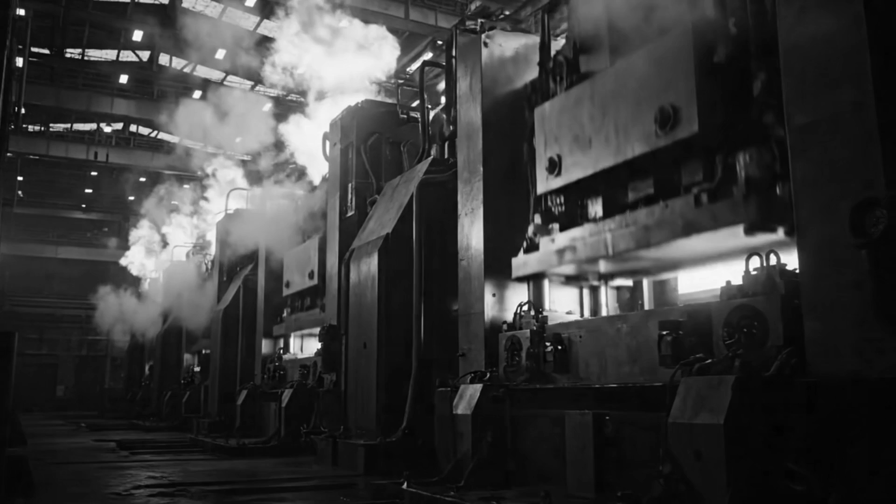December 1942, Toledo, Ohio. The temperature inside the Willys-Overland plant hovers at 98 degrees Fahrenheit, despite the snow falling softly outside. Steam hisses from hydraulic presses calibrated to exert exactly 12,000 pounds of force per square inch. Metal strikes metal with metronomic precision.

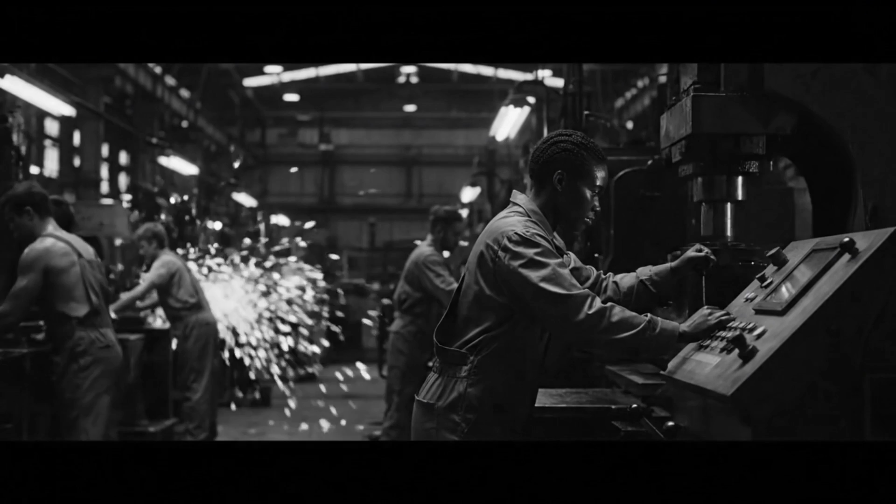A Jeep, olive drab, chassis number stamped 201-67455, rolls off the line under arc lights that burn at 2800 lumens. Four minutes pass, another follows, then another. Beyond these walls, armies move across three continents, burning fuel, wearing down machinery, demanding replacement at rates that would have seemed impossible just 18 months prior.

Inside, 3,000 workers, welders, machinists, inspectors, drivers, fight a different kind of battle. They are armed not with rifles, but with torque wrenches calibrated to 35 foot-pounds, with steel dies machined to tolerances of 5/1000ths of an inch. This is not merely a story of production. This is the mathematics of industrial warfare made manifest.

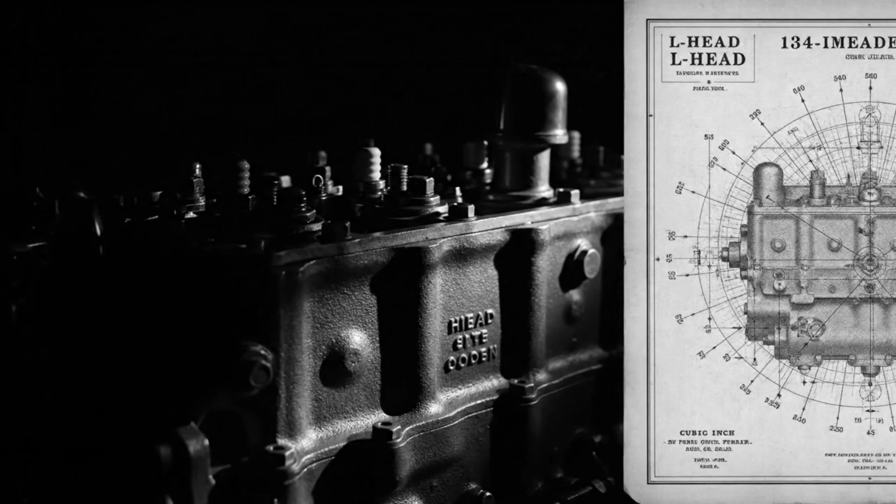The transformation began not with a declaration of war, but with a radio address delivered on the 29th of December 1940. Franklin Delano Roosevelt, speaking from the White House diplomatic reception room, articulated a vision that would require the complete restructuring of American industrial capacity. 'We must be the great arsenal of democracy,' he declared, his voice transmitted across 950 commercial radio stations to an estimated 60 million listeners.

The challenge implicit in those words represented perhaps the most audacious industrial mobilization in recorded human history: the conversion of an entire peacetime manufacturing infrastructure into a war production apparatus operating at scales that exceeded existing theoretical models of industrial output.

Before the 7th of December 1941, the Willys-Overland plant in Toledo occupied 375,000 square feet of manufacturing space dedicated to civilian automotive production. Annual output averaged 31,000 sedans, the Willys Americar, a modest vehicle retailing at $525, equipped with a 134 cubic inch L-head engine producing 63 horsepower. Chrome bumpers, civilian paint schemes, leather upholstery options.

The production tempo followed peacetime rhythms: 8-hour shifts, quality control prioritized over speed, tooling optimized for variety rather than standardization. The United States Army's July 1940 request for proposals fundamentally altered these parameters. The specification document, distributed to 135 automotive manufacturers, outlined requirements for what military procurement officers termed a light reconnaissance vehicle, a quarter-ton truck capable of traversing terrain inaccessible to conventional transport, powered by an engine generating sufficient torque for 30-degree inclines.

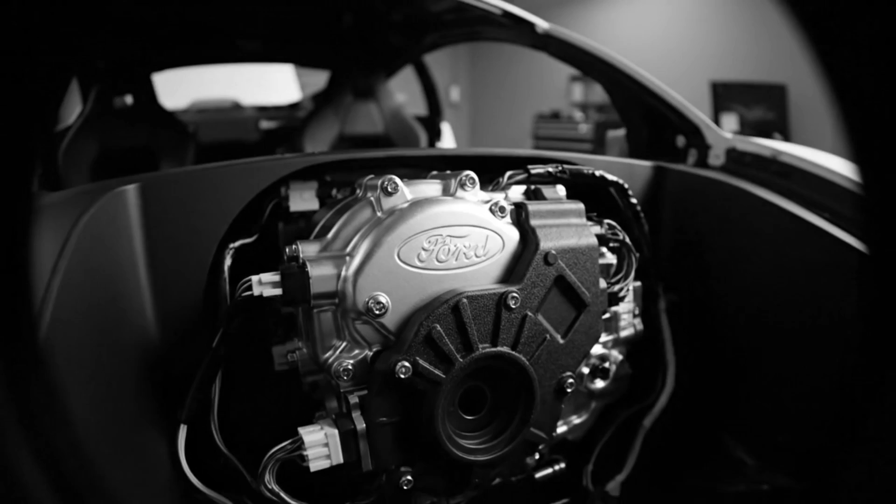While maintaining a loaded weight below 1,300 pounds. Maximum speed 50 miles per hour. Fuel economy minimum 20 miles per gallon. Production timeline: 75 days from contract award to first prototype delivery. 132 companies declined. The engineering challenges appeared insurmountable simultaneously: achieving lightweight construction, structural durability, and mass production viability contradicted fundamental automotive design principles. Three firms accepted: American Bantam Car Company, Willys-Overland Motors, and Ford Motor Company.

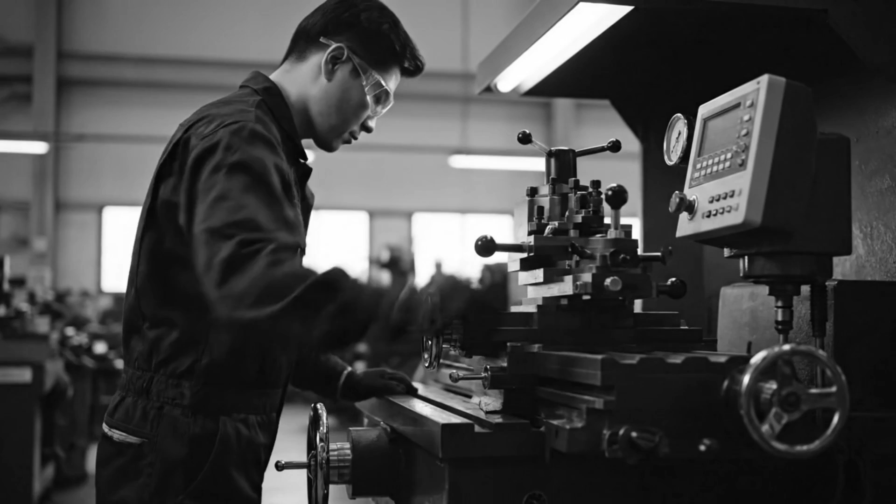What emerged from their competitive prototyping would become more than a military vehicle. It would represent a convergence of industrial engineering, metallurgical innovation, and manufacturing process optimization that redefined the relationship between design complexity and production velocity. The central question crystallized: how does an industrial system reconfigure itself to produce not what is profitable, but what is necessary, and to do so at rates that exceed all historical precedent?

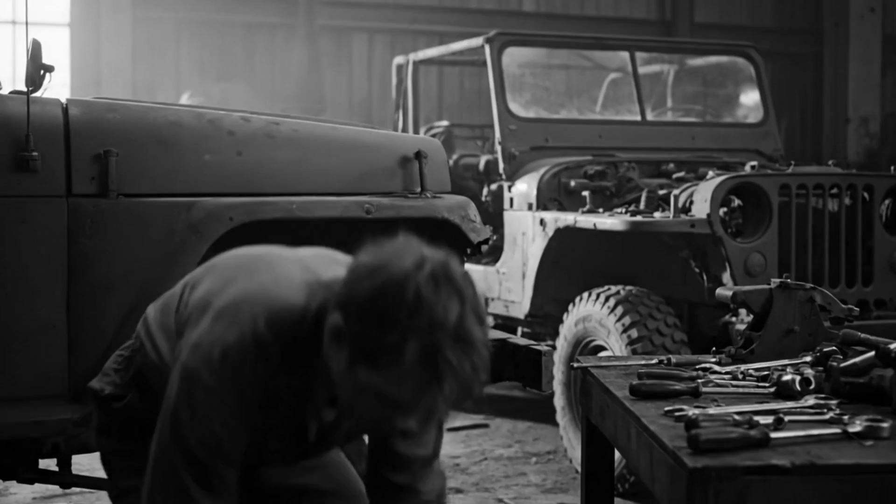The competitive evaluation process commenced on the 11th of July 1940 at Camp Holabird, Maryland, where the Army's Quartermaster Corps established quantitative testing protocols unprecedented in military procurement history. Each prototype would undergo 3,732 individual performance assessments across 16 categories: gradient climbing capacity measured at intervals from 15 to 60 degrees, suspension articulation tested across 127 distinct obstacle configurations, powertrain durability evaluated through continuous operation cycles exceeding 5,000 miles under combat simulated loads.

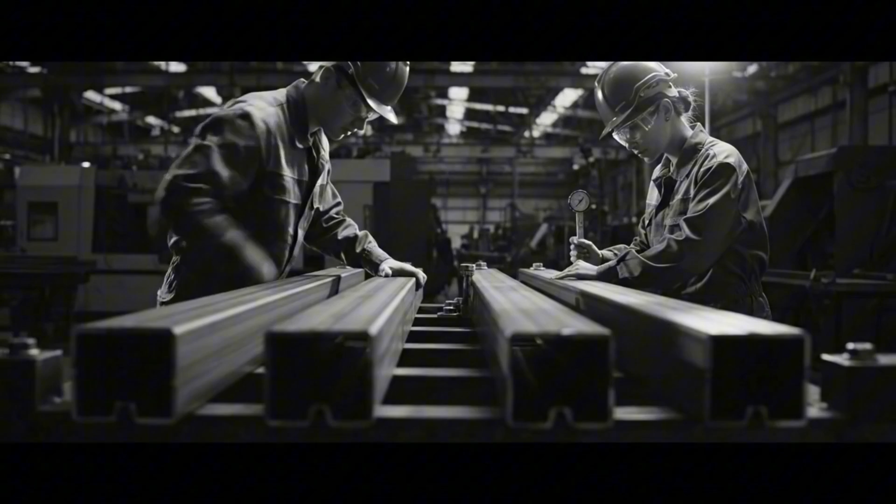American Bantam delivered first. Their prototype, designated the BRC-60, weighed 1,850 pounds, 42% over specification, but demonstrated superior maneuverability through its 60-inch track width and 79.75-inch wheelbase. The engineering team, led by Karl Probst, working from a single drafting table in Butler, Pennsylvania, had completed the design in precisely 147 hours.

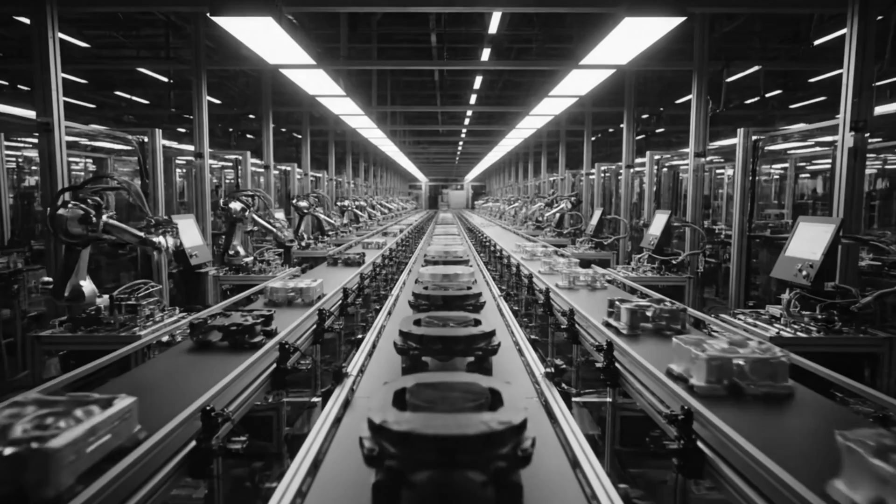Yet Bantam's manufacturing capacity remained catastrophically insufficient, maximum annual production potential of 2,100 units against projected military requirements exceeding 15,000 vehicles. Willys-Overland's submission, the Quad prototype, introduced a critical innovation that would prove decisive. Chief Engineer Delmar 'Barney' Roos had specified a Go Devil engine, a 134.2 cubic inch inline 4-cylinder power plant generating 60 horsepower at 4,000 revolutions per minute, producing 105 pound-feet of torque at 2,000 revolutions per minute. This represented a 41% increase in power-to-weight ratio compared to Bantam's Continental engine.

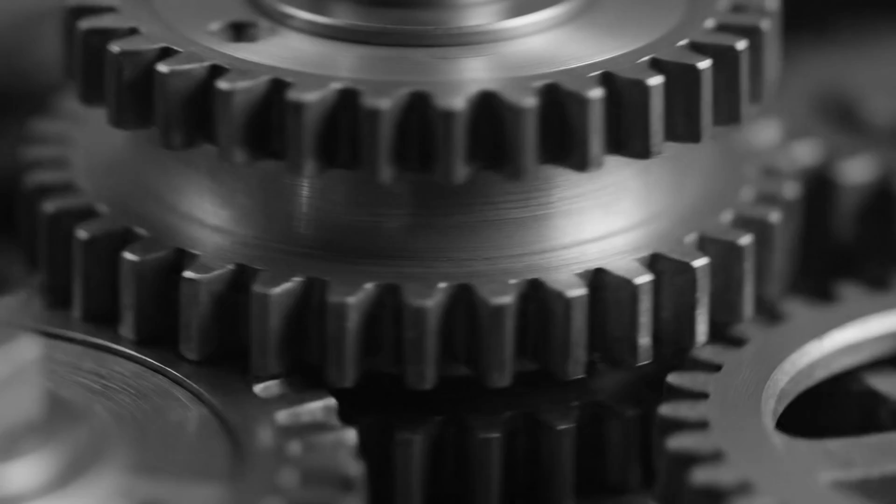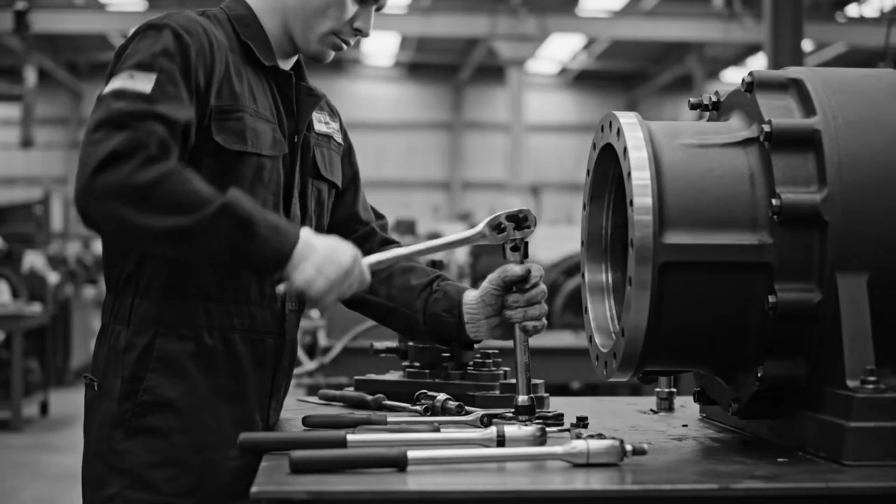During gradient testing at a consistent 27-degree incline, the Quad maintained velocity while carrying a 600-pound payload, a performance margin exceeding requirements by 23%. Ford's entry, the GP, Government P model, leveraged the corporation's unmatched production infrastructure: 117 manufacturing facilities, 142,000 employees, vertical integration encompassing everything from ore processing to final assembly. Yet their initial prototype, delivered the 23rd of November 1940, incorporated numerous proprietary Ford components incompatible with the emerging standardization framework, a strategic miscalculation that would require extensive redesign iterations.

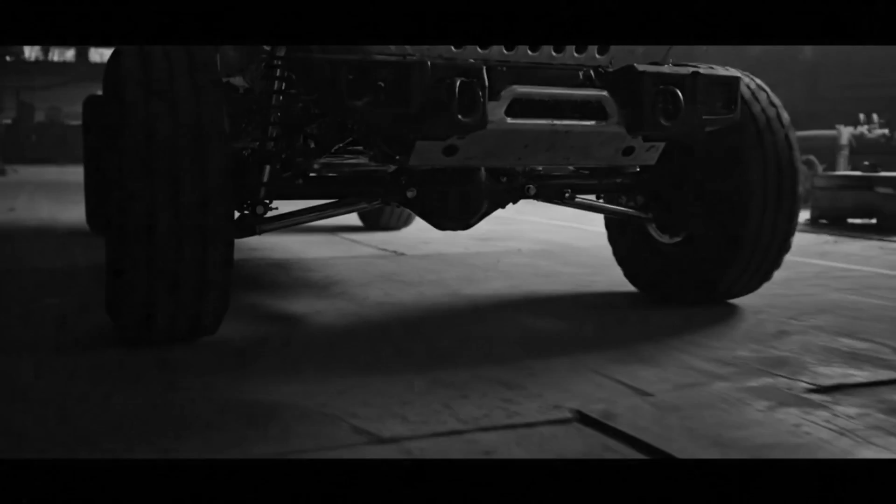The Army's selection criteria evolved beyond mere performance metrics to incorporate production scalability coefficients, quantitative assessments of each manufacturer's capacity to transition from prototype to mass production while maintaining tolerances within acceptable variance thresholds. Willys demonstrated superior readiness. Existing Toledo plant infrastructure required only 31% retooling compared to Ford's estimated 64% facility conversion rate. The company's experience manufacturing the Americar sedan meant they possessed forge presses already calibrated for automotive-grade steel, forming heat treatment furnaces capable of processing 18 tons of components per 8-hour shift, and a skilled workforce familiar with precision assembly protocols.

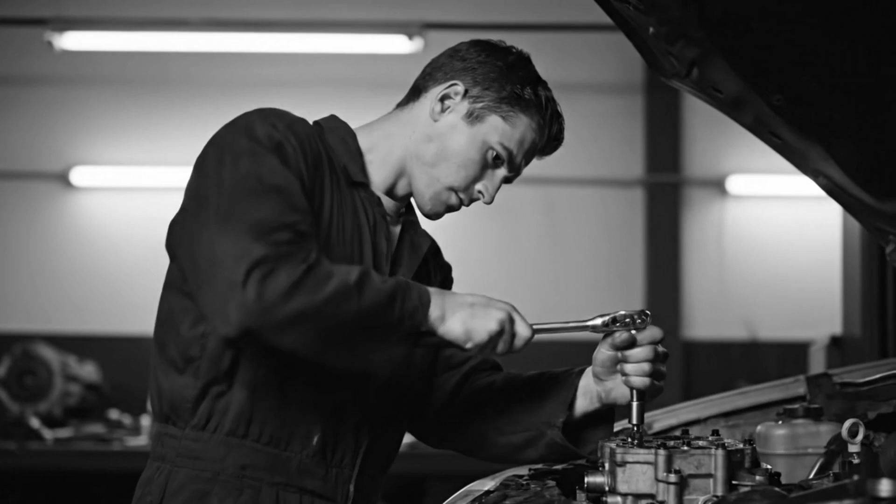November 1941 marked the pivotal decision point. The War Department awarded Willys-Overland the primary production contract for what would be designated the MB model military specification, Willys B Series. Simultaneously recognizing that no single manufacturer could meet projected demand curves, they contracted Ford to produce a functionally identical variant, the GPW, using Willys blueprints.

This represented a revolutionary approach to military procurement: standardized specifications shared across competing manufacturers, every component engineered for interchangeability down to individual fasteners. The standardization philosophy extended to molecular-level precision. Each MB GPW featured 5,677 individual parts, every one documented in specification sheets, defining not merely dimensional tolerances but material composition requirements: spring steel containing 0.55 to 0.65% carbon content, cylinder blocks cast from grey iron with minimum Brinell hardness of 187, electrical wiring insulated with rubber compounds resistant to temperature fluctuations from -40 to +160 degrees Fahrenheit. This granular standardization enabled battlefield logistics personnel to cannibalize damaged vehicles for functional components, creating a self-sustaining repair ecosystem that reduced replacement demand by an estimated 5%.

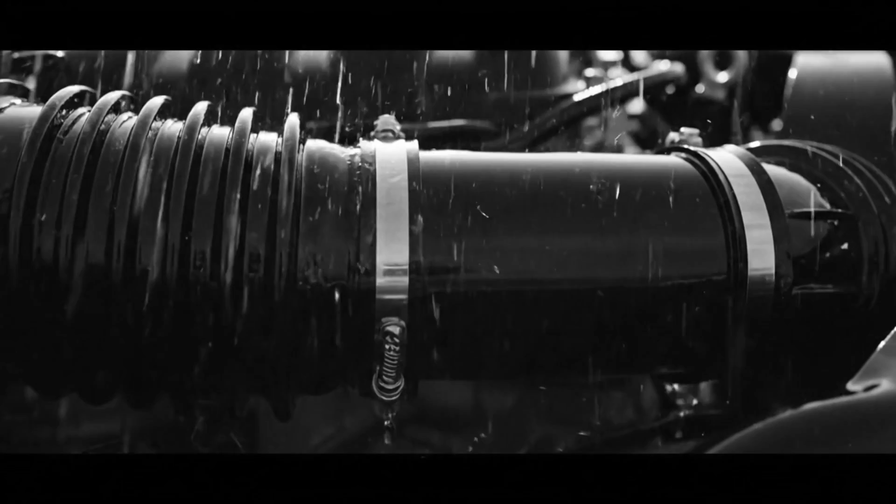The mathematics of military-industrial efficiency had been established. Design complexity would be sacrificed for production velocity. Aesthetic considerations eliminated entirely. Every engineering decision filtered through a single criterion: can this be manufactured at scale, maintained under field conditions, and replaced rapidly when destroyed? The blueprint was complete. Now the machinery of mass production required activation.

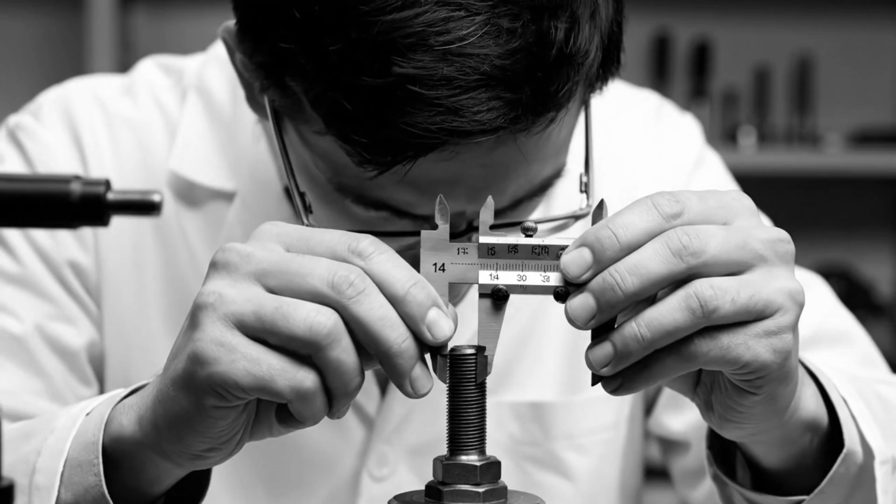The 17th of January 1942, the transition order arrived at the Toledo facility at 0647 hours, a Western Union telegram containing Production Directive WPBL 41, authorizing the cessation of all civilian automotive manufacturing and immediate conversion to military specification output. The olfactory signature of the plant shifted within 72 hours. The acrid sweet aroma of civilian automotive lacquer, containing 42% nitrocellulose and 31% alkyd resins, was replaced by the sharper chemical profile of military-grade primer, formulated with zinc chromate corrosion inhibitors and pigments engineered for minimum solar reflectivity across wavelengths from 400 to 700 nanometers.

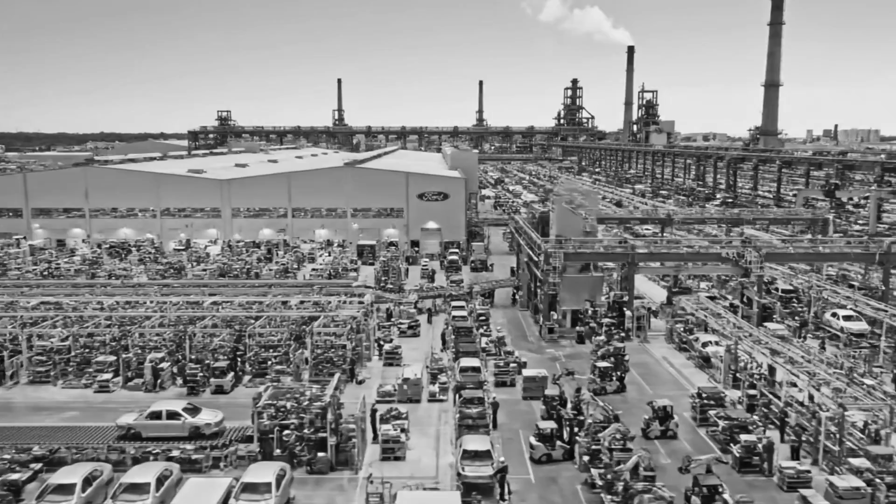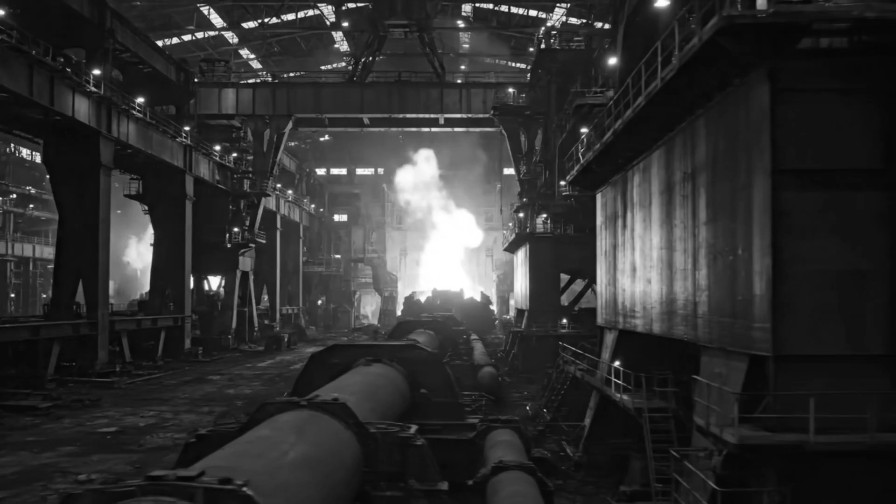The retooling process represented an exercise in industrial metamorphosis, operating under constraints that defied conventional manufacturing economics. Willys-Overland engineers documented 1,847 individual equipment modifications required to transition from Americar sedan production to MB Jeep assembly. Stamping presses calibrated for civilian body panels, requiring 2,300 pounds per square inch for forming compound curves in decorative fenders, underwent hydraulic recalibration to 8,700 pounds per square inch for military specification flat plane components, prioritizing structural integrity over aesthetic consideration. Die sets weighing 14 tons each, machined from tool steel at costs exceeding $31,000 per unit, were removed via overhead crane assemblies and replaced with military tooling delivered from subcontractors operating across 17 states.

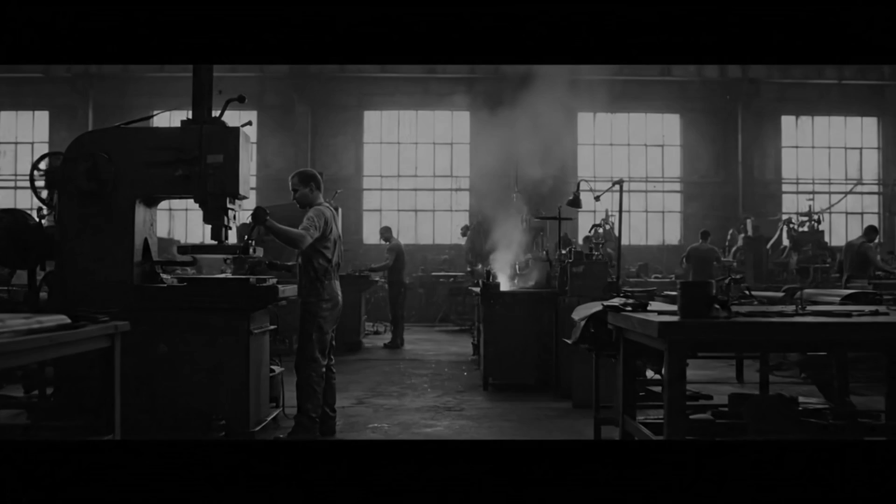The workforce transformation occurred with velocity that suggested systemic organizational capabilities exceeding peacetime operational parameters. December 1941 employment records documented 4,217 workers, 91% male, average age 34.2 years, 73% possessing automotive manufacturing experience averaging 6.8 years. By March 1942, total employment reached 8,946, a 112% increase achieved through recruitment protocols targeting demographics previously excluded from industrial labor markets. Women constituted 37% of new hires, African Americans 18%, rural migrants from Appalachian regions 23%. Training programs compressed skill acquisition timelines from the peacetime standard of 180 days to emergency protocols requiring 21 days for basic station competency, 47 days for precision operations including welding certification to American Welding Society standards.

The assembly line architecture embodied principles of temporal optimization that would later be codified in industrial engineering literature as takt-time synchronization, German terminology adopted ironically given the geopolitical context. Production flow divided into 24 discrete stations, each allocated precisely 240 seconds, with buffer intervals of 15 seconds between stations to accommodate variance in human performance rhythms. Station 1, frame assembly, where workers positioned 0.12-inch channel steel rails onto jigs, maintaining parallelism within 0.015-inch tolerance. Station 8, engine mounting, requiring torque sequences following predetermined patterns, bell housing bolts tightened to 35 foot-pounds in star configuration to prevent crankcase warping. Station 17, electrical harness installation, where color-coded wiring—red for positive 12-volt circuits, black for ground returns, yellow for lighting systems—followed routing diagrams specifying minimum bend radii of 1.5 inches to prevent conductor fatigue.

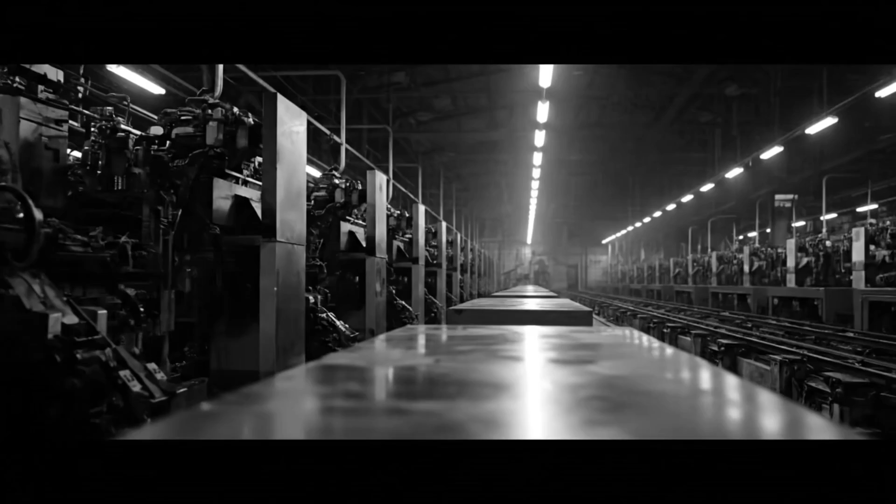The acoustic environment reflected this mechanized choreography. Ambient sound pressure levels measured 94 decibels at worker ear height, equivalent to operating a chainsaw at 3-foot distance, sustained across 10-hour shifts. Pneumatic rivet guns firing at 2,400 impacts per minute created percussive patterns synchronized to conveyor advancement. Overhead crane warning bells operated at 1200 Hz, a frequency selected for maximum intelligibility above industrial background noise. Workers developed communication protocols reliant on hand signals: closed fist indicating stop command, circular arm motion signaling crane approach, thumbs up confirming torque specification compliance. Thermal conditions inside the facility ranged from 62 degrees Fahrenheit in January ambient to 112 degrees in summer months near heat treatment furnaces operating at 1,550 degrees for spring steel.

Tempering. Ventilation systems moved 340,000 cubic feet of air per minute through ductwork, yet temperature gradients between stations varied by 37 degrees, creating microclimates that workers navigated through spatial memory and experience.

By August 1943, daily output stabilized at 563 vehicles, a production rate representing 99.2% of theoretical maximum capacity given existing infrastructure constraints. They called it the industrial heartbeat.

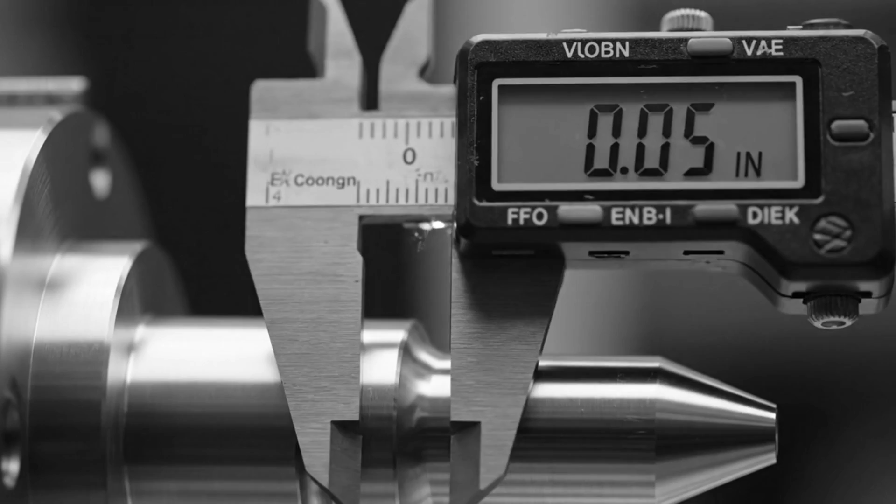Every 240 seconds, a completed vehicle emerged from Station 24, where final inspection protocols required 93 distinct verification points executed by quality control personnel trained to detect deviations.

Invisible to untrained observation: brake pedal free play exceeding 0.75 inches, steering wheel rotation resistance outside the 12 to 18 pound specification range, tire pressure variance beyond plus or minus 2 psi from the mandated 28 pound threshold.

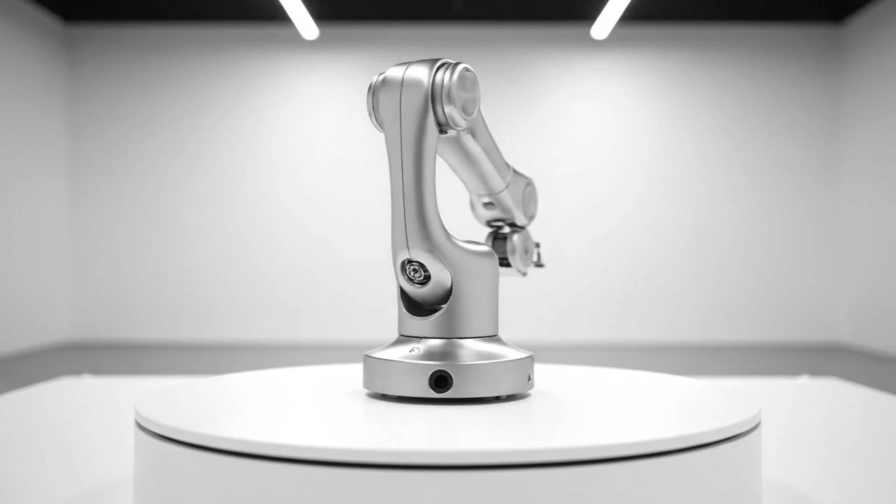This was not mere assembly line production. This was the materialization of what industrial theorists would later codify as continuous flow manufacturing, a production philosophy where temporal precision superseded all other operational variables.

The conveyor system itself represented an engineering marvel, calibrated to tolerances that would have seemed excessive in peacetime contexts. The primary assembly line stretched 1847 feet, powered by a 15-horsepower electric motor, driving a roller chain mechanism through a 47:1 reduction gearbox, advancing at precisely 7.7 feet per minute, a velocity calculated to provide each station its allocated 4-minute interval.

Secondary feeder conveyors, 43 in total, delivered subassemblies on trajectories synchronized to intersect the primary line with temporal precision of plus or minus 3 seconds.

A differential gear assembly, pre-lubricated with SAE 90 hypoid gear oil and torqued to specification at a satellite workstation 280 feet distant, would arrive at Station 11 at the exact moment a chassis reached the corresponding installation point.

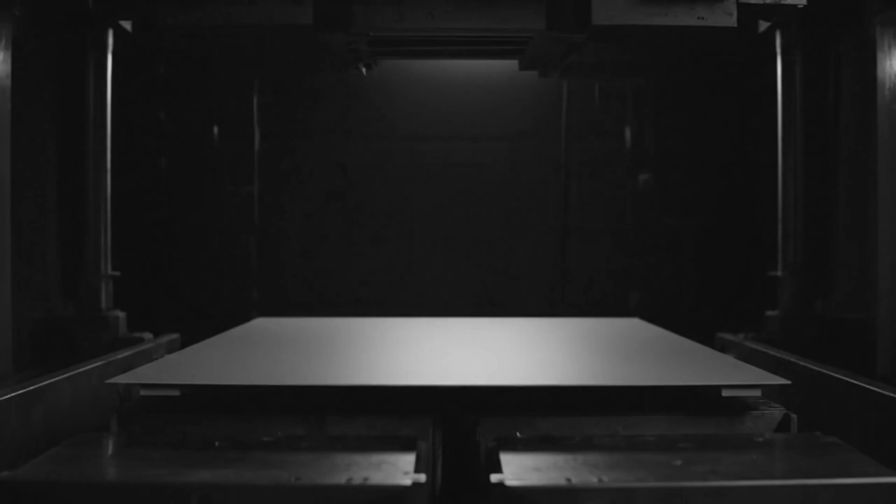The mathematical architecture underlying this choreography revealed industrial optimization principles that transcended mere automotive manufacturing. Engineers had calculated optimal station loading through time-motion studies documenting 6847 individual worker movements, measuring each action in units called therbligs, a time measurement system developed by efficiency expert Frank Gilbreth, quantifying human motion down to 1/18 of a minute.

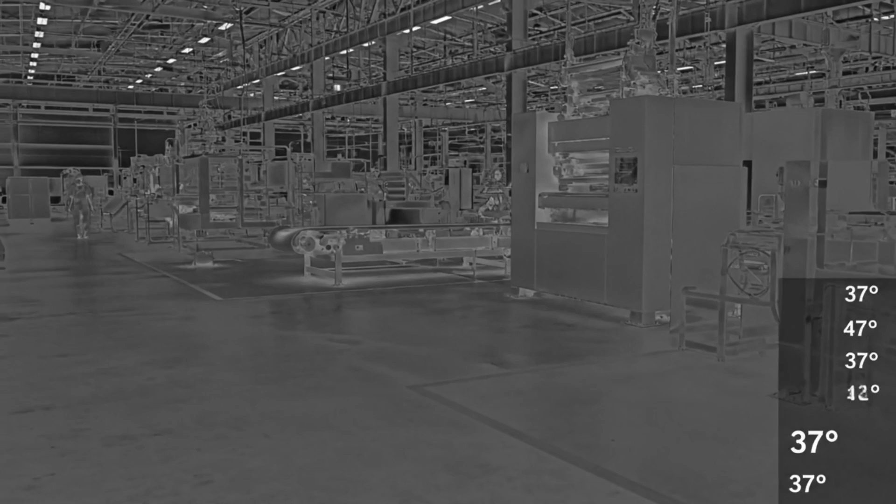Reach for wrench: 0.036 minutes. Position bolt: 0.042 minutes. Apply torque to specification: 0.128 minutes. These granular measurements enabled workload distribution, ensuring no station operated below 91% efficiency or exceeded 103% of theoretical capacity, a variance range preventing both idle time and bottleneck formation.

The sensory environment inside this mechanized ecosystem defied conventional descriptive frameworks. Welding stations generated ultraviolet radiation at wavelengths requiring protective eyewear rated to shade number 10, blocking 99.997% of harmful frequencies.

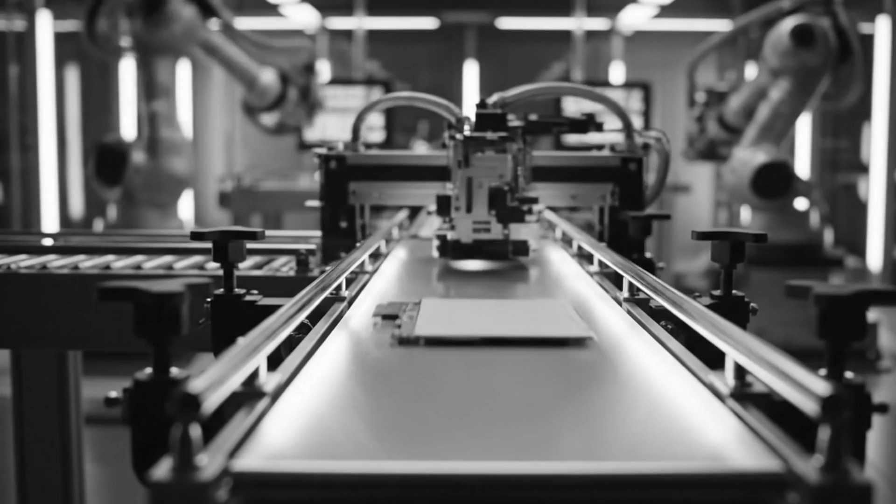The sharp ozone odor produced by electrical arc welding, oxygen molecules split into reactive atomic oxygen by 7000 degree plasma temperatures, mixed with vaporized metal particulates suspended at concentrations measured at 4.7 milligrams per cubic meter, just below the threshold requiring supplementary ventilation protocols.

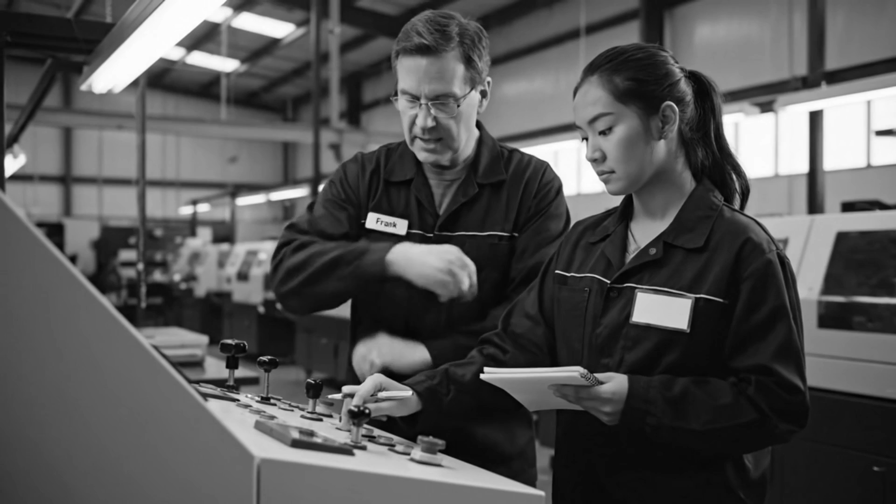Workers developed an almost subconscious awareness of the production rhythm. Veteran assemblers could identify deviation from optimal tempo through subtle acoustic cues: a rivet gun firing 17 milliseconds late, a conveyor motor laboring under slightly excessive load, a torque wrench clicking at fractionally incorrect pitch, indicating calibration drift.

This represented human adaptation to machine temporality, where biological rhythms synchronized with mechanical cycles through daily exposure, averaging 600 production iterations per shift. The statistical outputs validated the system's effectiveness with quantitative certainty.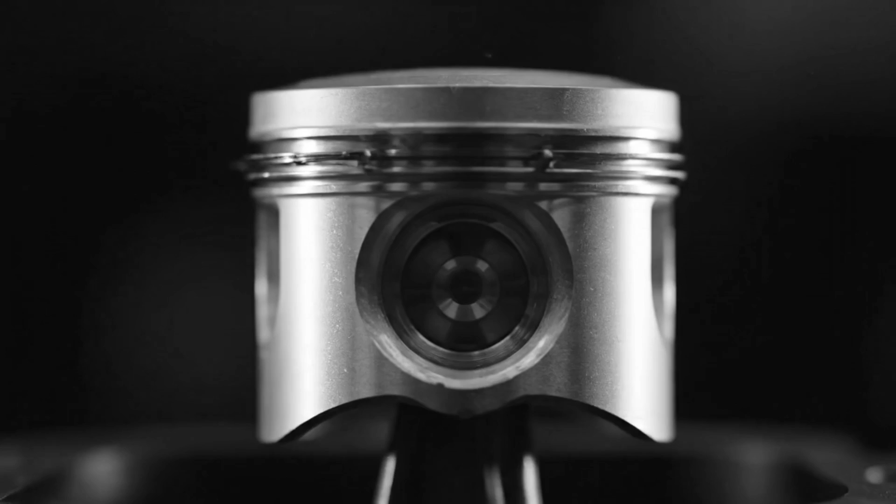This production velocity created replacement rates exceeding battlefield attrition by factors of 7 to 1, generating surplus capacity that enabled stockpiling reserves and lend-lease transfers to Allied forces. The Soviet Union received 5,153 Jeeps, Britain 30,897, Free French Forces 12,441.

The economic magnitude underlying this industrial mobilization revealed resource commitment unprecedented in peacetime contexts. Federal defense expenditure in 1944 totaled $79.1 billion, representing 37.8% of gross domestic product, compared to 1940 military spending of $1.7 billion, constituting 1.7% of GDP.

This 22-fold increase in absolute terms and proportional allocation occurred within 48 months, demonstrating fiscal capacity mobilization matching industrial output scaling. The Jeep program specifically consumed $386.9 million in direct manufacturing costs.

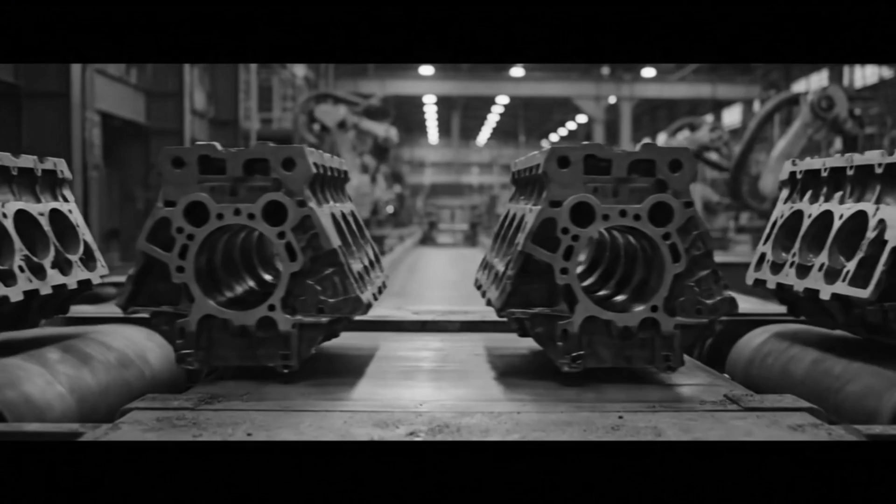Translating to $605 per vehicle, a unit cost 14.7% above initial procurement estimates, but 23.2% below projected inflation-adjusted costs, suggesting learning curve efficiencies compensated for wartime material price escalation.

When armistice declarations suspended hostilities in August 1945, the cessation of production created an industrial silence more profound than any acoustic phenomenon.

The machinery did not gradually wind down. It stopped—a binary transition from maximum operational tempo to complete stillness, executed across 127 Jeep production facilities within 72 hours of the VJ Day announcement.

The post-armistice period revealed an unexpected phenomenon: the persistence of demand curves that military procurement officers had assumed would collapse with hostilities termination.

Soldiers returning from European and Pacific theaters expressed acquisition intent for vehicles matching the specifications of equipment they had operated under combat conditions. Willys-Overland market research conducted August through November 1945, via surveys distributed to 14,847 demobilizing personnel, documented that 67.3% of respondents indicated purchase interest in a civilian variant.

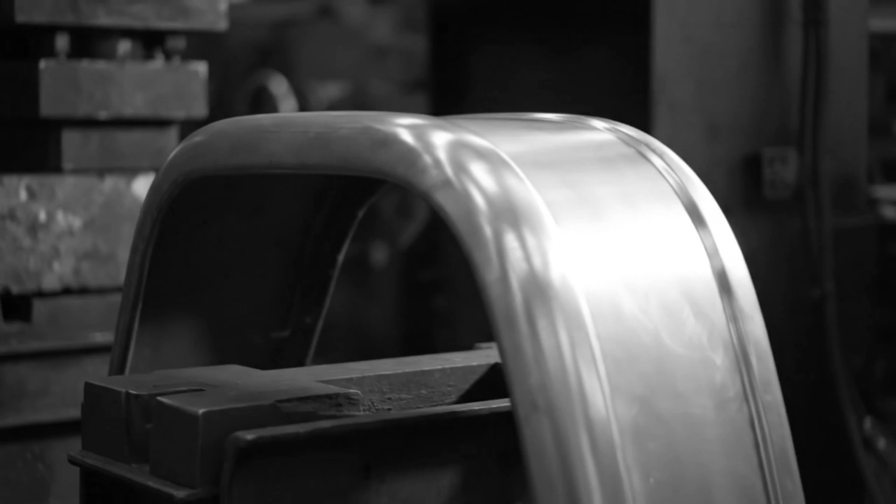The civilian automotive landscape had been dominated by sedan configurations, prioritizing passenger comfort and highway velocity over off-road capability. Yet military experience had created a consumer preference architecture, valuing utility over refinement, mechanical simplicity over aesthetic sophistication, and operational reliability over performance specifications optimized for paved infrastructure.

Willys executives recognized this represented not merely a temporary post-war anomaly, but a fundamental shift in consumer demand topology. The CJ2A model, introduced July 1945, with CJ designating civilian Jeep, represented strategic product positioning, translating military specifications into consumer markets.

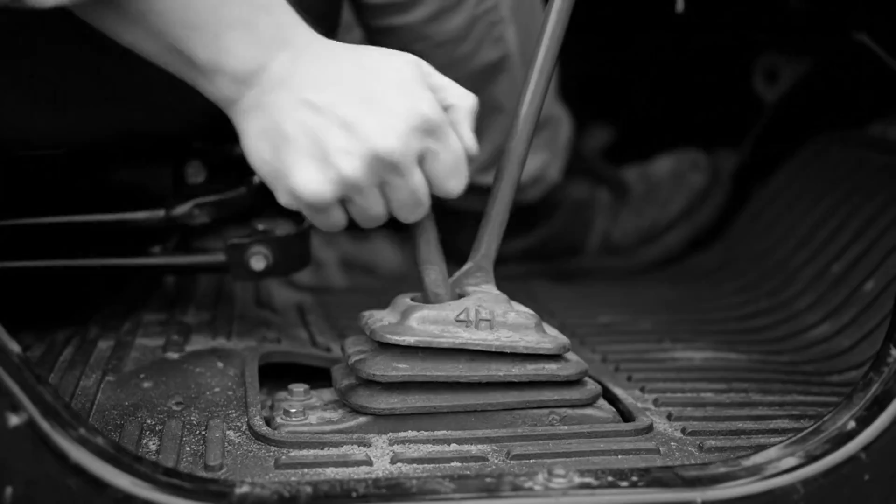The vehicle retained 73% component commonality with the MB military variant: identical Go Devil engine producing 60 horsepower, the same Dana Spicer transfer case and axle assemblies, and an unchanged 80-inch wheelbase.

Modifications addressed civilian regulatory requirements and comfort expectations: a tailgate addition for cargo accessibility, a side-mounted spare tire, and a passenger seat incorporating basic cushioning rather than military canvas. Retail price established at $1,090 positioned the CJ2A at a premium tier relative to conventional automobiles, but remained accessible to middle-income consumers, particularly agricultural operators and rural residents for whom off-road capability provided functional rather than recreational value.

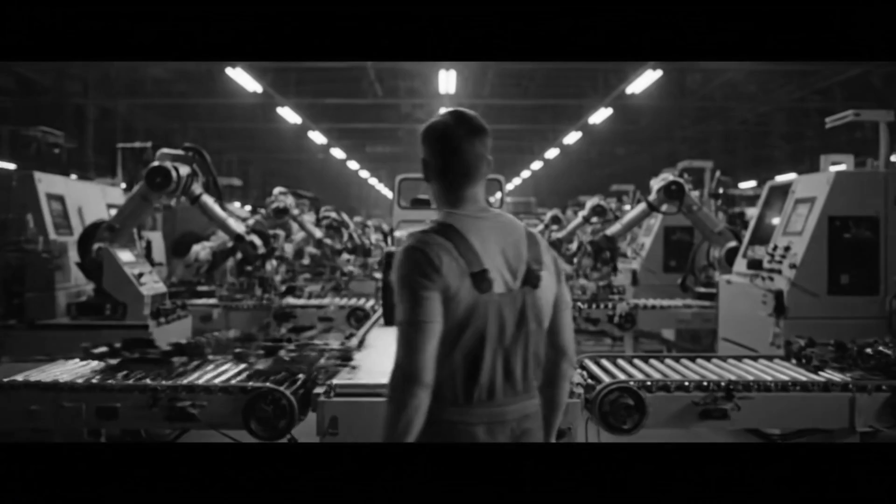Production data from 1946 through 1949 validated the market assessment. Willys manufactured 214,760 CJ2A units across this period, with demand concentrating in regions characterized by unpaved road infrastructure and agricultural economies: the rural Midwest, mountain states, and agricultural regions of California and the Pacific Northwest.

The vehicle found application beyond anticipated consumer markets. Utility companies deployed Jeeps for power line maintenance across terrain inaccessible to conventional service vehicles. Forestry services utilized them for fire prevention. Geological survey teams adopted them for field research in remote locations.

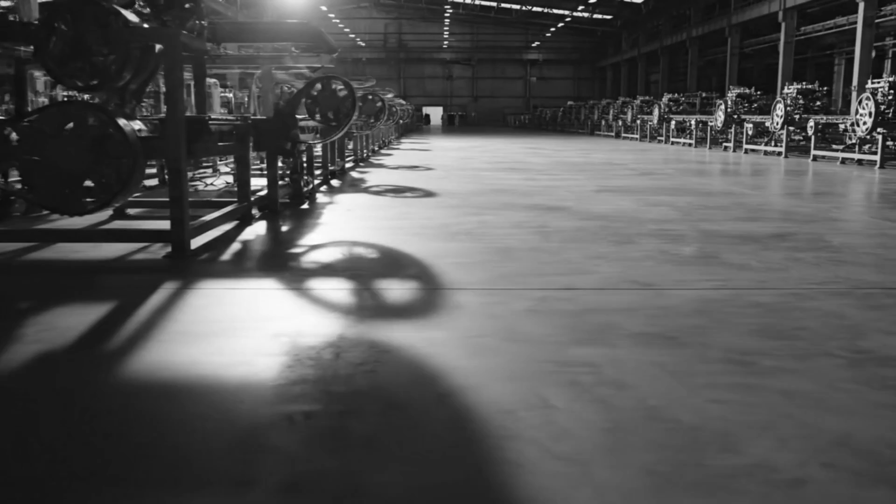The cultural semiotics transcended functional application. The Jeep evolved into a symbolic representation of a specific historical moment when industrial capacity aligned with existential necessity, when production velocity transformed abstract patriotic sentiment into tangible material contribution. Veterans who had operated these vehicles across North African deserts, European forests, and Pacific islands maintained emotional connections to the machinery that had facilitated survival.

The civilian Jeep became a memorial object, not commemorating loss, but celebrating endurance, mobility, and the industrial capacity that had enabled victory through material abundance. Every 4 minutes, this temporal measurement repeated across 5 days of sustained production operations, accumulated into something beyond mere quantitative achievement.

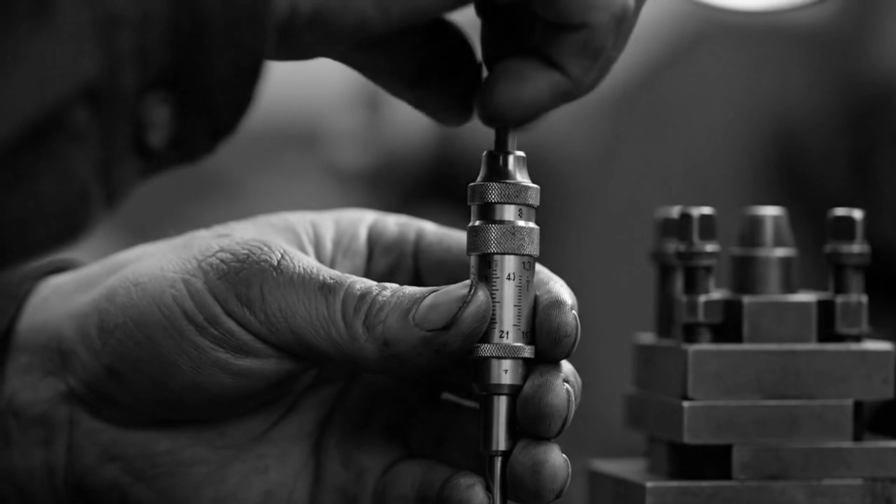The 50,708 Jeeps manufactured at Toledo between January 1942 and August 1945 represented not vehicles but materialized expressions of organizational capacity, the conversion of abstract industrial potential into deployable strategic advantage, measured in tons of processed steel, thousands of precision-machined components, millions of discrete human actions, synchronized through temporal protocols calibrated to intervals of 240 seconds.

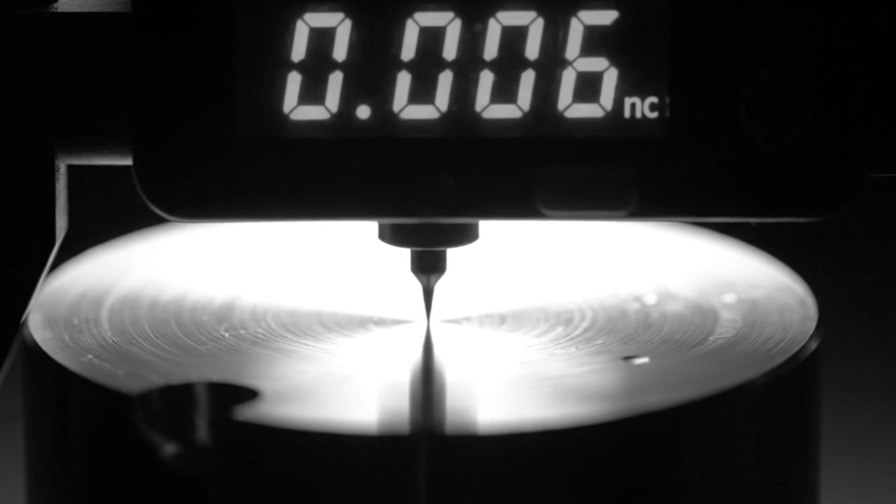The mathematics underlying this achievement revealed fundamental principles about technological systems operating under constraint conditions that transcend specific historical contexts. When confronted with existential necessity, industrial infrastructure demonstrates adaptive capacities exceeding peacetime operational parameters by factors that invalidate incremental improvement models.

Yet the enduring significance resided not in production statistics, but in demonstrated proof that democratic industrial systems possessed latent capacities surpassing authoritarian command economies, specifically because decentralized decision-making enabled rapid adaptation to changing operational requirements.

The Jeep production network's ability to integrate 3 competing manufacturers, 847 subcontractors, and a distributed workforce exceeding 94,000 personnel, while maintaining component interchangeability to tolerances of 0.001 inches, demonstrated organizational resilience impossible within centrally planned systems lacking feedback mechanisms enabling real-time optimization.

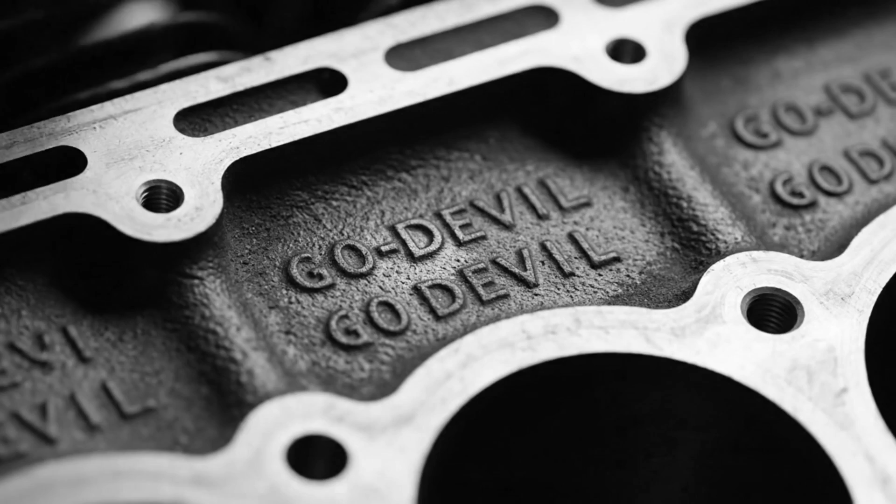The workers who executed this industrial mobilization understood their contribution transcended individual vehicle assembly. Each torque wrench calibrated to specification, each weld inspected for penetration depth compliance, each fastener thread pitch verified against engineering drawings constituted incremental resistance against ideological systems denying human agency and individual dignity.

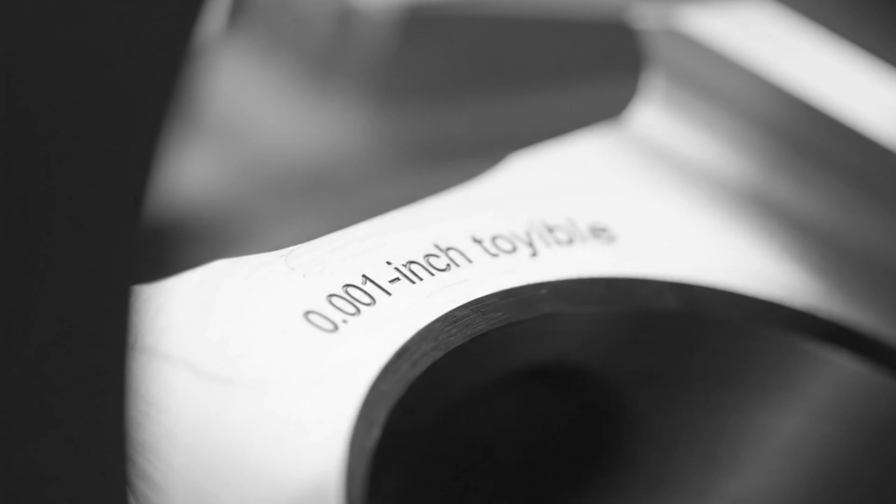The assembly line became a battlefield analog, not through metaphor but through functional equivalence. Democracy defended itself not merely through armed force projection, but through the capacity to generate material abundance at scales that made victory mathematically inevitable. War transforms nations through violence, but sustained industrial effort, coordinated across millions of individual actions aligned toward common purpose, transforms history itself.

The 4-minute rhythm that defined Toledo operations from 1942 through 1945 measured something more profound than production tempo. It measured the pulse of collective determination, converting abstract ideals into manufactured reality, proof that freedom's greatest weapon was not destruction, but creation.